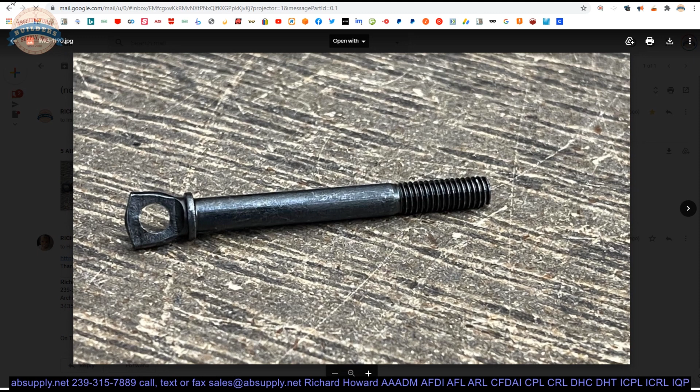Here is the item that we are looking at. Let's take a look at the photos that we have here first. There's the bolt. The threads at the one end, the yoke at the other end, the shoulder stop.

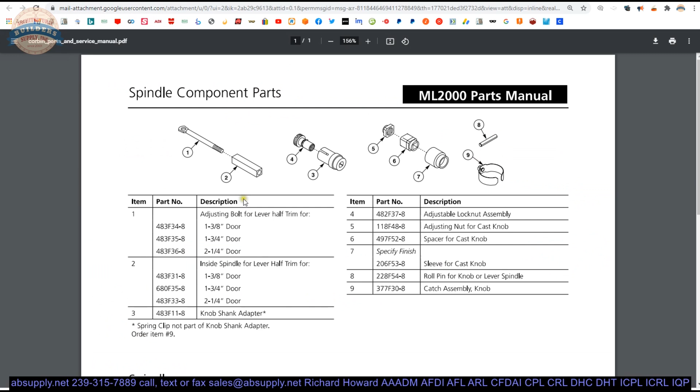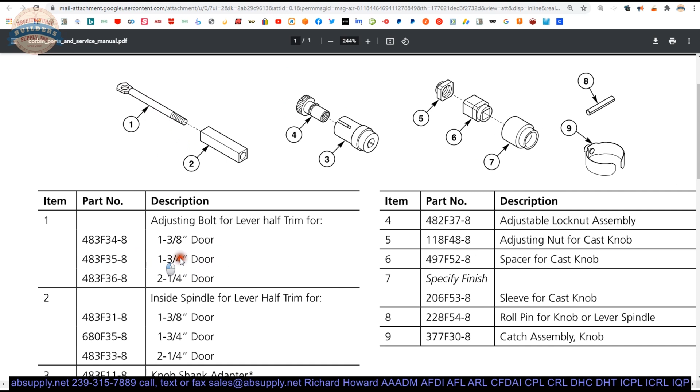Now we have a parts manual that's linked down below. You can see exactly where this 483F35-8 is going to be used. Part number 1 for 1 3/4 thick doors, and 2 other part numbers here for different door thicknesses.

So this is handy. You can kind of get the idea of where this is going to go together. This is the spindle for your half lever trim as well.

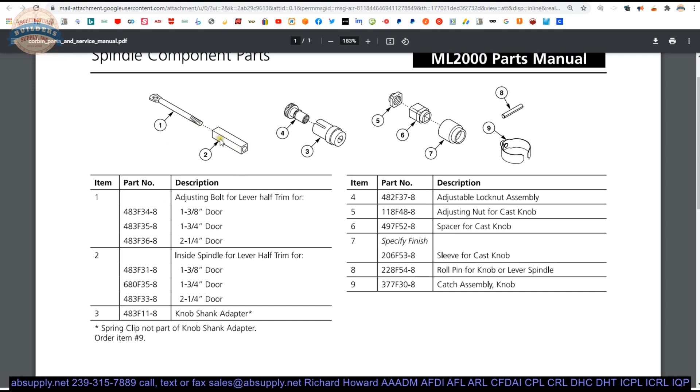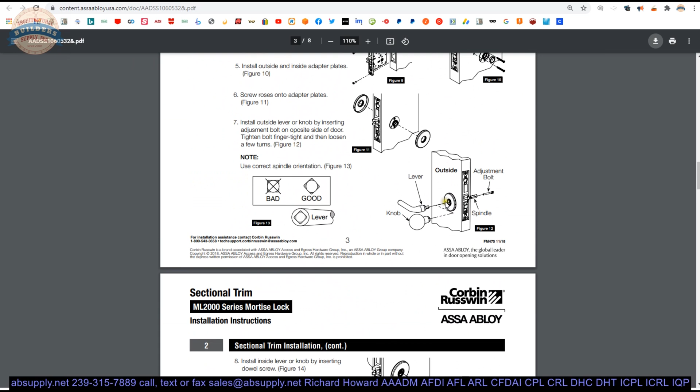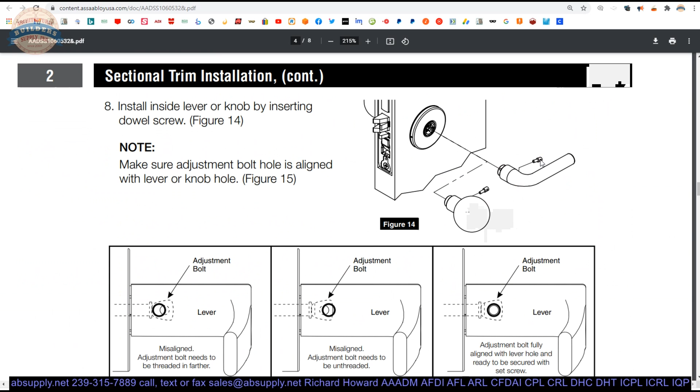But we also have a link to the installation instructions below here as well that will show a reference to what this looks like, and basically troubleshooting if it doesn't go together correctly. Here's your adjustment bolt and your spindle. Referring to those set screws I had mentioned earlier, and the means by which to adjust to make sure that you get proper alignment with your set screw.

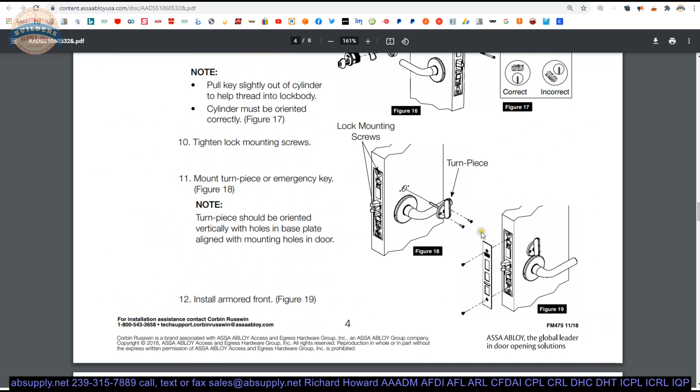So the installation instructions are listed here just to give you an idea of, oh, that's how that works. Otherwise, you may not be familiar with it at all. There was a time that I hadn't seen it either.

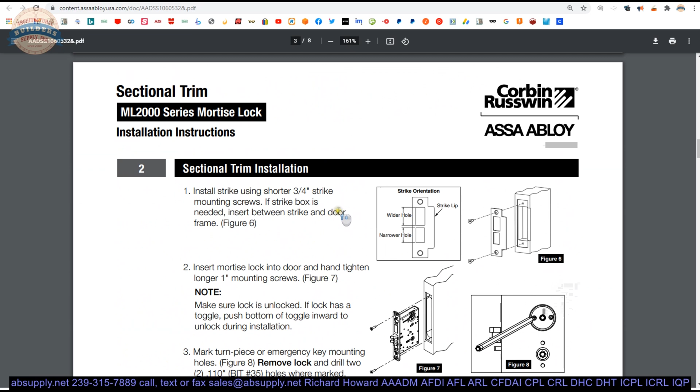So there you go. Now there is a link below this video here to the manufacturer's page. This is a pretty handy page because it will allow you to review not only all of the Corbin Russwin products that we sell by means of this horizontal navigation, but also a link to the manufacturer's website, as well as several encyclopedic documents, as you can see here.

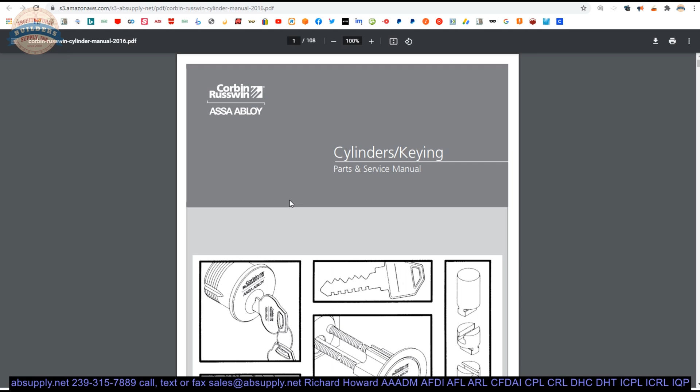Ones that I'd like to point out to you, probably the most valuable encyclopedic document ever published by any manufacturer ever, maybe with the exception of Medeco, is this Corbin Russwin cylinder manual. That is 100 pages or so of everything as it governs the history of P.F. Corbin, Russell and Erwin, Corbin Russwin, all their keyways, with the exception, forgive me, of probably the last 15 or 20 years. It's a document that reaches back a century in time.

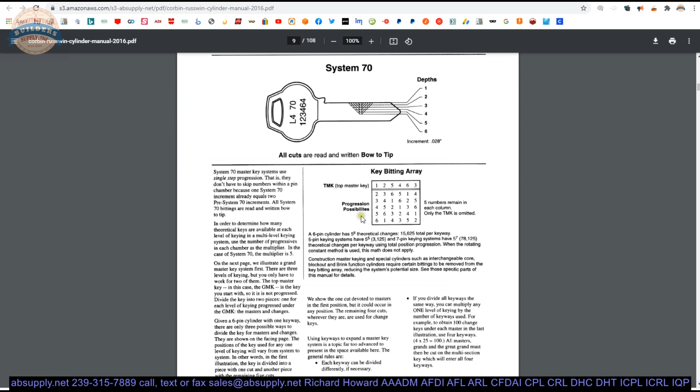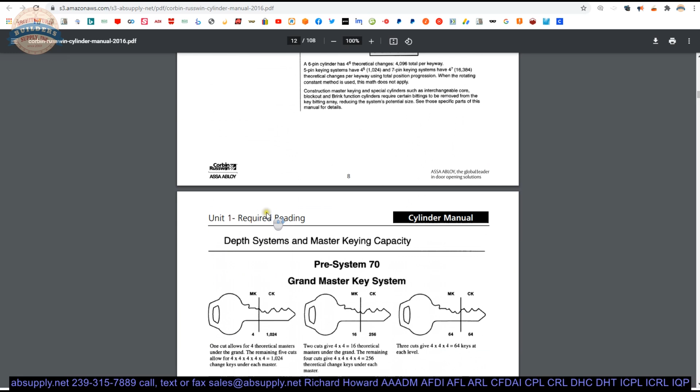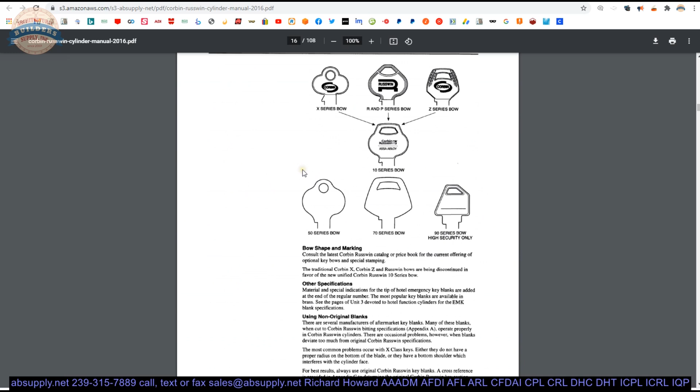It will just allow you to understand the keying system that Corbin Russwin is known for today, or the several and many different platforms of keying systems that they maintain. It would prove to be, in my opinion, completely without any success trying to navigate the world of Corbin Russwin key systems without this document.

Also, what's on this page would be the parts and service manual we have here. And indeed, that's probably the document where the 483F35-8 came out of. As you can see, it's a rather large document. Let's just wait for that to load. 546 pages. So if you're looking for parts, this would be the document to refer to.

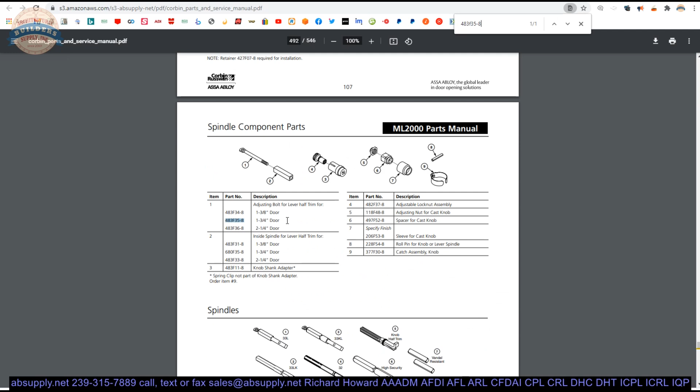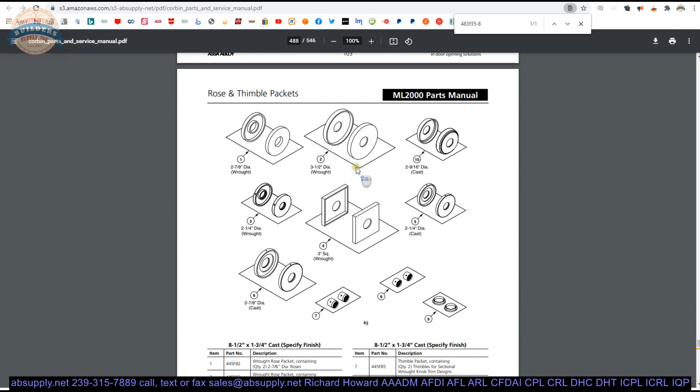483 F35-8, and we search that, Control F, you'll indeed get to the ML 2000 series parts manual. Other parts obviously are here as well. If you call the factory, they're probably referring to this document, so check it out before you give a call.

And let's wrap up this video on camera.